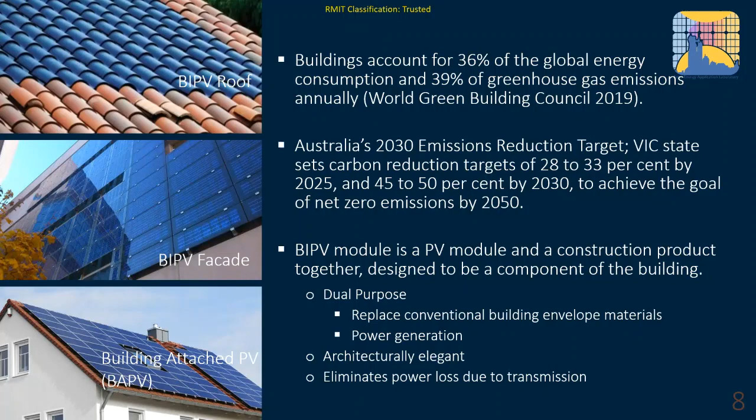So globally in the market, there are different products presented in different colors, transparency, texture, etc., with different integration systems. I think this message is very important, especially for the building sector in Australia, so they can select the right product for their project.

In terms of the project itself, globally, a lot of projects have been developed, not only in Europe in the last 10 years, but now we see a lot of changes happening in China. Meanwhile, other countries such as North America, Canada, Singapore, including Australia, have seen a lot of changes in this area in the last 2 years.

For the application side, BIPV can be used on the rooftop to replace roof tiles, roof shades, skylights, and can also be used on the building facade to replace curtain wall, rain screen facade, spandrel panel, etc. It can also be used as a shading device to replace carport roofs, etc. So there are a lot of application potentials to replace building envelope elements, and there are already successful cases globally to demonstrate that.

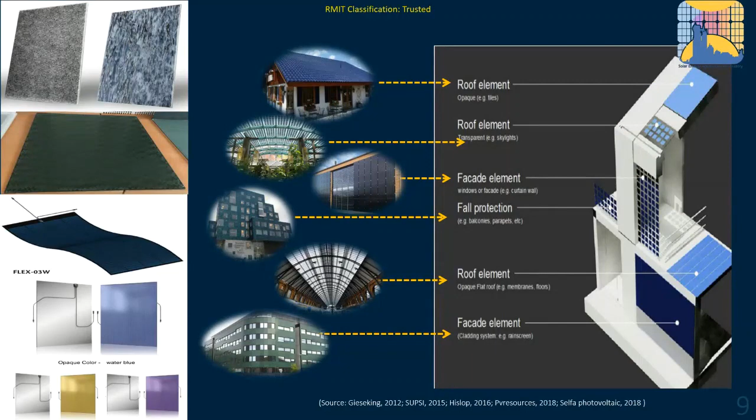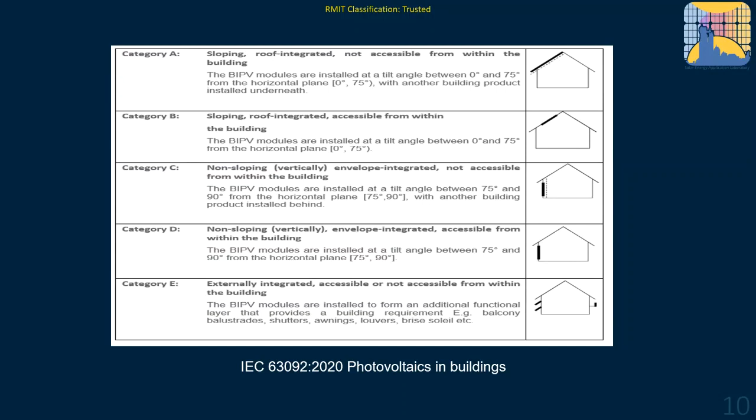In terms of categorization, the most accepted standard up to now is IEC 63092. We propose 5 categories. The first 2 are related to roof applications, differing by whether we can access the BIPV product from inside the building or not. The next 2 categories are about facade application, again depending on whether we can access from inside the building. The last category is about external integration, such as shading devices.

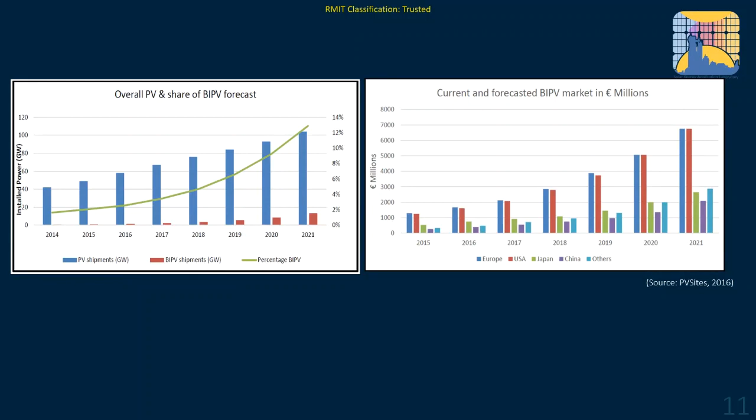Meanwhile, we do understand there is a lot of resistance to BIPV. A key problem is economic viability, so we want to understand whether BIPV is feasible or not, apart from the technical side.

Within our team, we collected a lot of existing global BIPV projects—45 at the date we published this publication, though now we have more cases coming. We did some analysis; as you can see, it covered different technologies, and all the products were developed in the last decade.

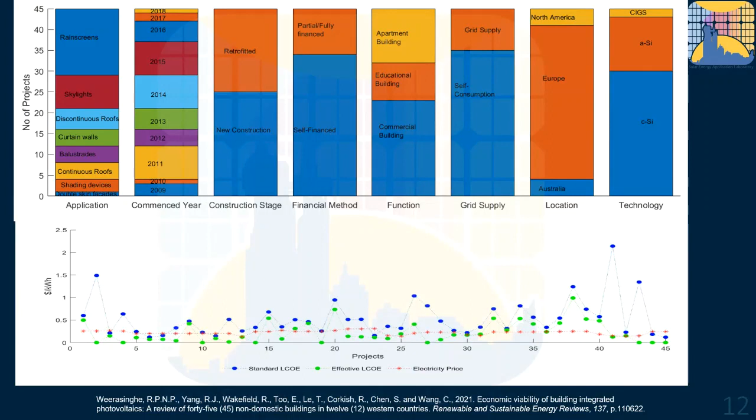We looked at the LCOE value as well as the NPV per kilowatt. From our understanding, if we consider the benefit that BIPV replaces conventional building envelope material, a lot of cases actually show good economic value. But it also shows that depending on technology and location, a lot of factors can impact the economic performance of a BIPV project. That makes more sense for building designers to really understand, for individual buildings in relation to a certain BIPV product, whether it is feasible to use.

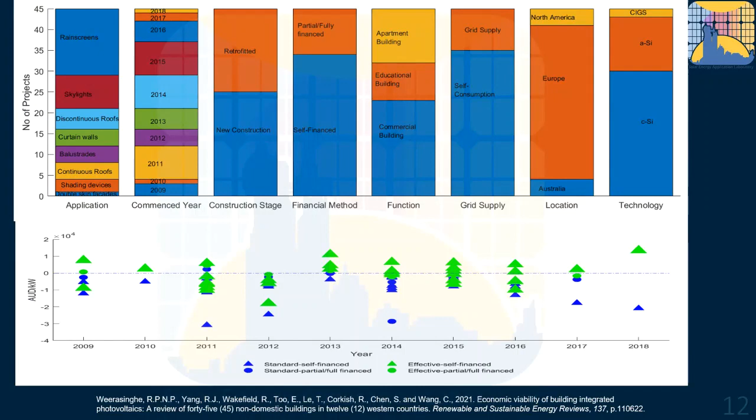Because every building, as we can see, is different. Yes, next please.

So, although globally a lot of products have been developed previously or are being developed recently, I also need to remind you that the charts we showed on the last slide are projects developed in the last decade, but basically completed 3 to 4 years ago.

Within these recent 3 years, there are a lot of new products with good value for money that have been developed as well. However, currently in Australia, if we look at some data, between 2014 and 2019, less than 2 megawatts of BIPV was installed in Australia. That's a huge difference compared to rooftop mounted PV.

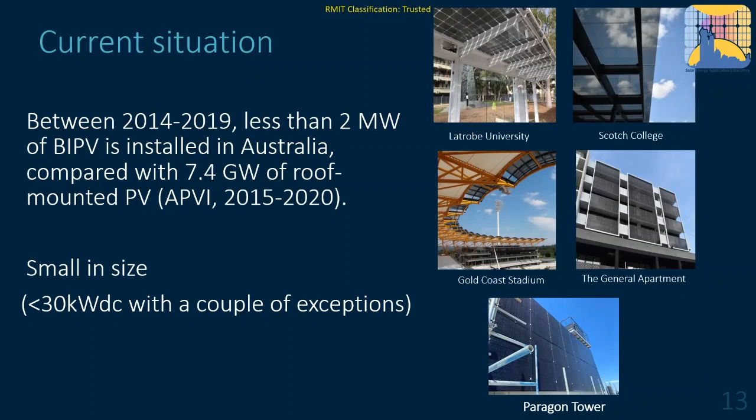And those products are very small in size. Although in recent years, from last year to this year, I do know there are some larger projects being developed with some interesting designs for building facades. Again, it's a culture change, and we do understand there are also a lot of hurdles for large uptake. Next, please.

To understand the complexity for BIPV product design, we looked into the different parameters which can impact the design, because different from rooftop PV design, BIPV is a building envelope material element. If you consider that as a prefabricated element, we not only need to ensure maximum energy generation but also consider the performance of the product. We also need to understand relevant regulations in relation to where you use the product, in terms of building class and building element, whether you want to use it as a window or as cladding material. The building regulations are different. Also, in terms of the construction process, what's the integration system to the main structure, that would impact the following steps in construction during building development stages.

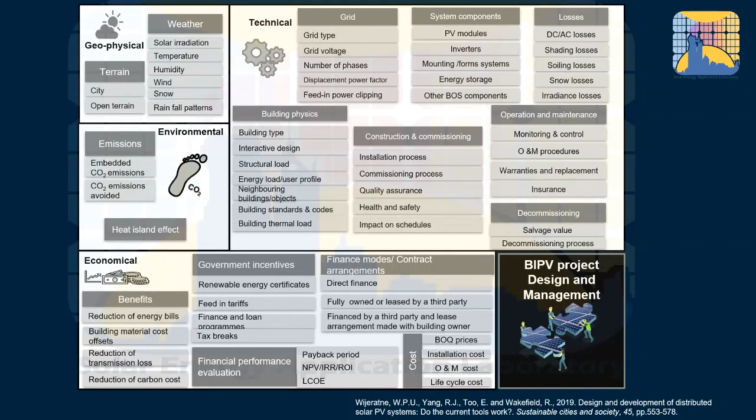Back to two years ago, we started to map it out according to the different factors we need to consider for a BIPV project. We mapped it out against the popular PV design software and also the popular building design software, to see whether those software or tools can help us really look into the BIPV aspect. It's not a surprise, but our main finding is that none of the existing tools or software platforms are really designed for BIPV specifically.

There are a lot of issues in relation to that. For example, some PV specific software really cannot allow PV panels to be used on the building facade. Even when they do allow it, they don't really have the BIPV database related to that. It's similar on the building side. Of course, you can create your own digital product, but that's fairly complicated, and only certain building professionals can use it. It's quite time consuming. On the other hand, if the PV manufacturer or distributor wants to demonstrate the value of their product, it's very hard for them to do so.

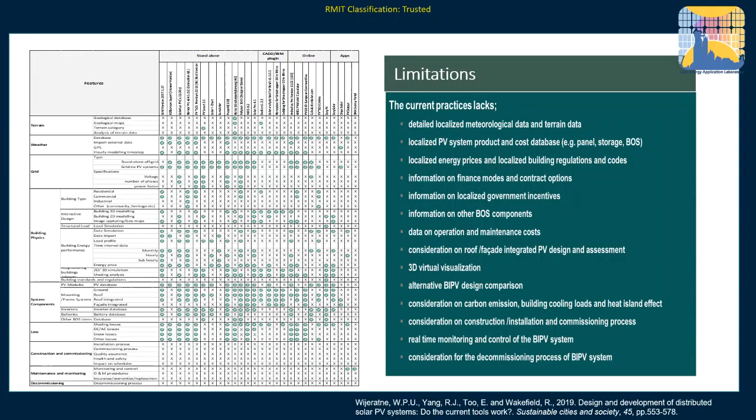So we propose some improvements. Next, Camilla, please. We propose some improvements, such as in relation to information - we think we should definitely establish a database for BIPV products.

Including not only the PV side parameters, but also the building required parameters or performance. We also need to enable the whole procedure for decision making, including building related cost information, for example for installation and labor, etc. But those are very hard for the PV sector to know. We also provide localized electrical side pricing and feed-in tariffs, because the majority of BIPV manufacturers are overseas. If we provide a packaged platform to reduce the effort from their side and demonstrate the value, that's good. In the meanwhile, building professionals can get more information about the BIPV product and it helps them do the design more easily.

For the simulation and assessment, we try to make it more professional and specific, like a building envelope design, so that you could place the PV panels wherever you want and replace the building envelope. We want to facilitate the optimization design process for decision making.

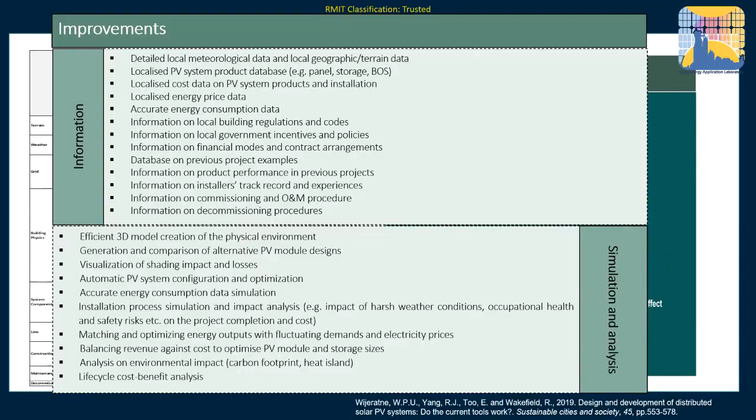Of course, based on one platform, we don't intend to solve all of the issues we have mentioned or pointed out. The reason is that BIPV currently in Australia hasn't been used a lot. The critical part for BIPV adoption is that building owners, developers, and architects need to accept this concept in the very early design stage instead of the detailed design stage. Otherwise it's too late, because the capital cost of BIPV is much more significant than rooftop PV, even considering the benefit of offsetting conventional building material. However, early decision making is very important for the building industry. That's why within the current platform we've developed, we want to provide a user-friendly platform and easy procedure that integrates product regulation, technical, economic, and construction data to create a leading BIPV solution.

So here's the framework of our platform. As you can see on the top, we created a BIPV product database. Within our whole database, we have more than 140 products. However, in the platform, depending on which version you select, the number varies because of some confidential information, etc.

We also have our standard database, which provides some building-related standard information, or at least understanding of the requirements. We build up the weather database based on data collected from BOM, and we build up the financial information database that includes localized rates, energy prices, etc., as well as construction related cost.

By collaborating with leading quantity surveying companies.

And we allow our users to build up 3D building models within our platform and do the energy simulation in terms of solar radiation, in terms of shading losses in the urban environment, and consider that to generate DC and AC outputs from that.

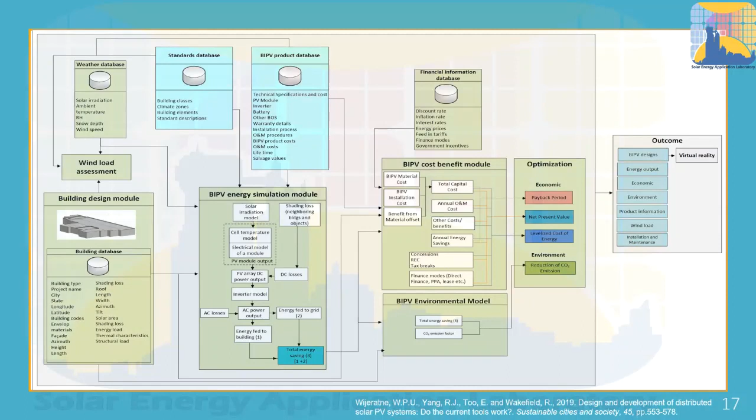This allows a lot of flexibility for them to do cost-benefit analysis, environmental related parameter analysis, and we give options for them to select different versions, whether they want automatic optimization to help with decision making or not. The output we provide in the platform includes the BIPV design in 3D format, energy output, economic and environmental analysis, product information depending on what you want, wind load performance, and installation and maintenance. We even provide a small VR app to facilitate the visualization process.

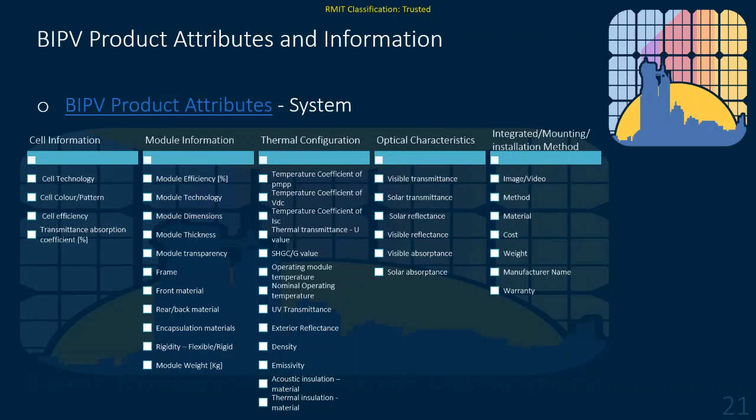Say the method, or some even provided images or video to show how to install their product. Next, please.

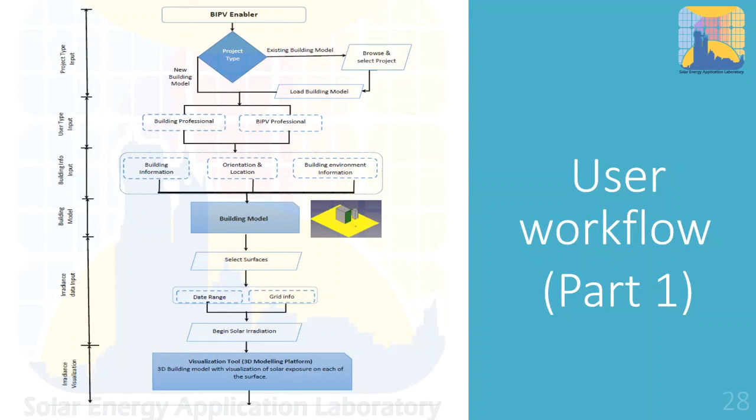And then you select the building surface where you want to put the PV, and give a duration you want us to do the solar irradiation simulation. So the platform would do that and generate and visualize the solar exposure from that in the urban environment.

And after that, you select BIPV application type, BIPV color, transparency - it's all about your preference and what product. Say PV manufacturers, you can select your own product. And then you set up some calculation parameters.

Then you have two options according to different versions of our platform. You can purely do the simulation by yourself, and we generate the results as what you prefer to say. Alternatively, there's an optimization module in one version where we could help you to generate the results. But no matter what version you do, we also do wind load calculation to tell you. And again, you have options for the VR part.

Okay, let's have a look at the demo video we generated for you. I think that's maybe the most important, interesting part in today's event.

Because we understand there are participants from the building sector and PV sector, here we just make a simple demonstration because of time constraints. We want to show you the major procedure.

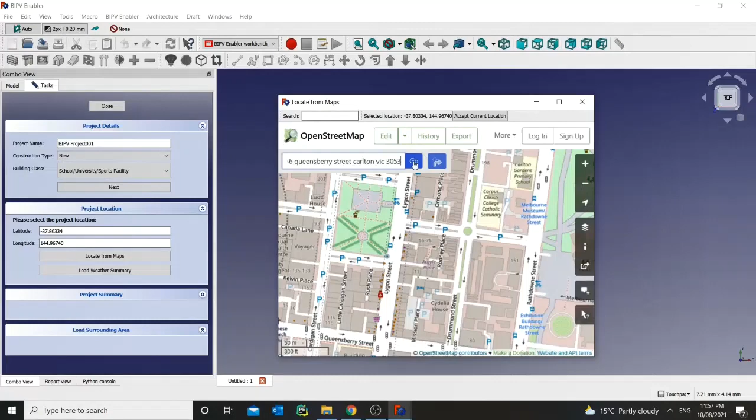So you can create a project, whether existing or renovated, and select building type. The next step will allow you to select the location of the building. You can either put in the exact location as you want, or you can select from the map. You can type in a location in Australia, and we would help you identify the exact location of that building, and put that information into our background.

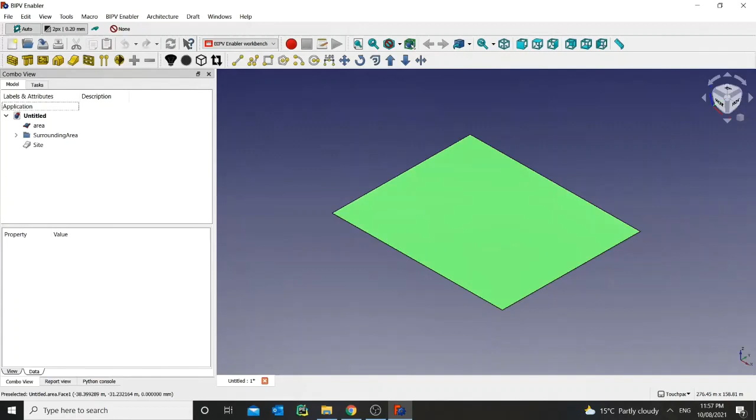Then the weather information - by default, we use the BOM data related to the nearest weather station, but you can put in your own. And then you generate the entire site you want to create.

Then you start with the 3D process. So you can select a building within different shapes. There are some predefined shapes, or you can design by yourself. You will see that shortly.

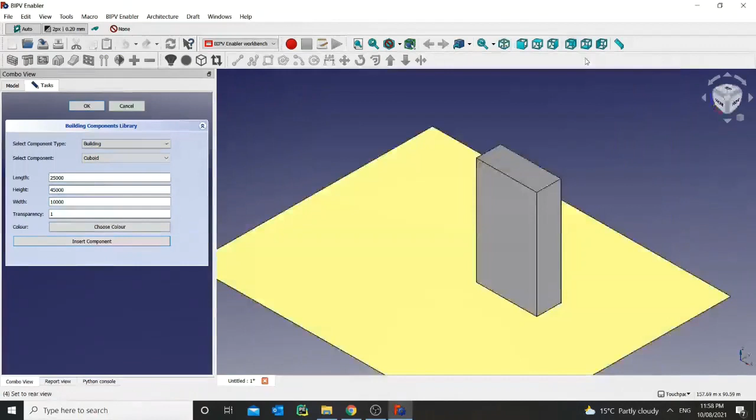Say, for example, this one is a pre-designed building, but of course you can change the dimensions - not very hard. And you can move around the building and change the orientation and location within your created site boundary. You will see that shortly, I believe.

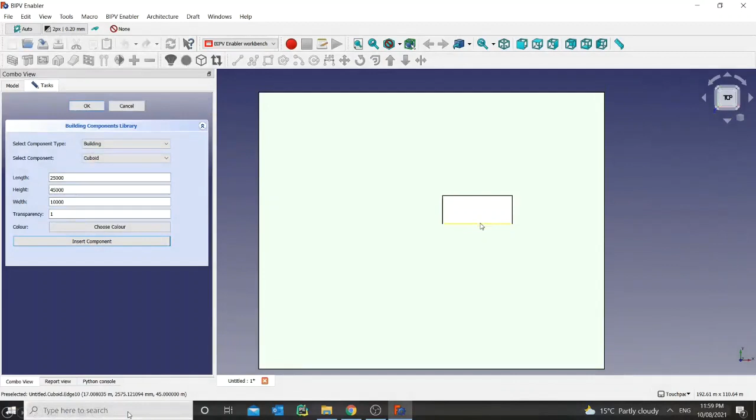Pam, the video is not playing. Okay.

You can move it, as you can see. You can change the orientation.

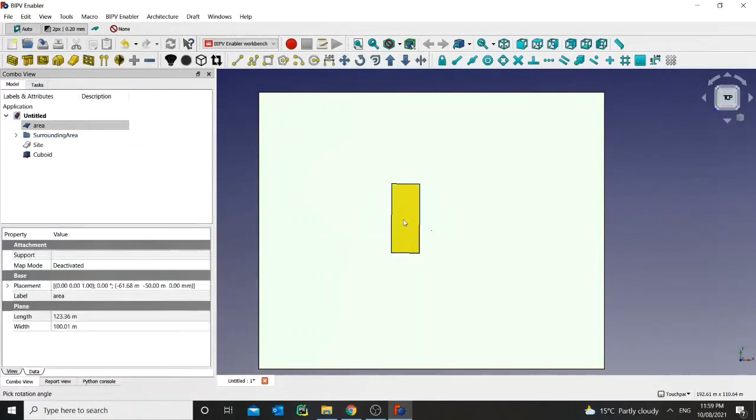Of course, you can create a building if you want, if you have an architectural background. For example, here we will show you that you can create a base of the building and then add walls to the building, choosing different basic shapes as well.

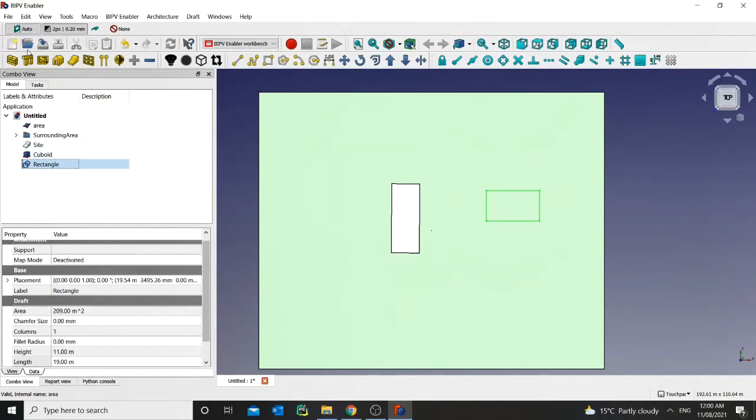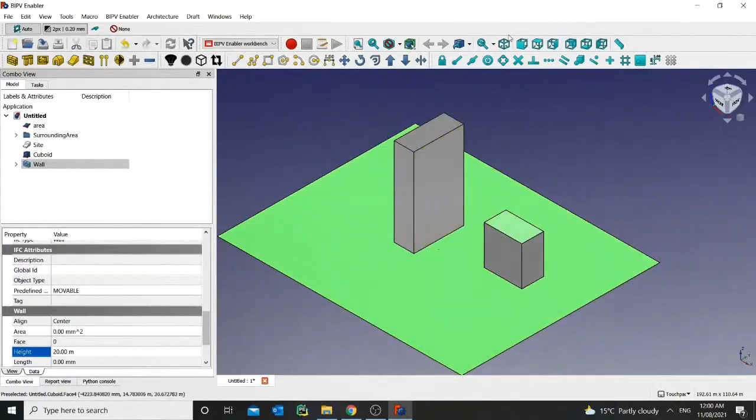It's most likely like a typical building design software. However, if you have a lot of building design experience, you can generate more complicated building design. But for a lot of users, especially for the conceptual design stage, you don't need to create very detailed design. You just create the demonstration of the building envelope and the neighborhood, as you can see, to help you simulate the solar irradiance.

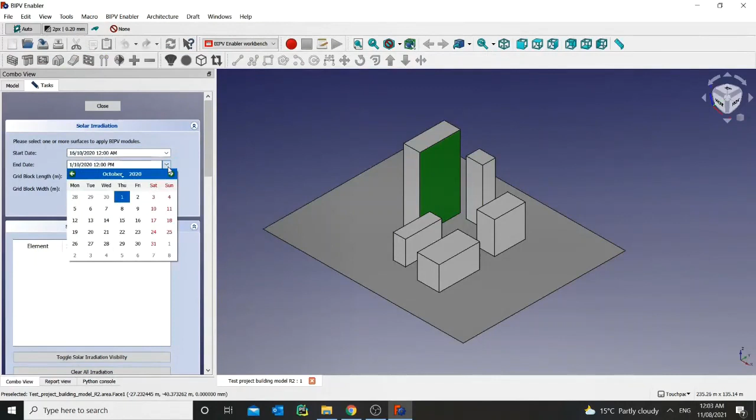And after that, you select a surface, as we highlighted, and you select a start date time and end date time. For this demonstration, we only did that for a day, because we also want to indicate how long it would take for the whole procedure. As you would notice at the bottom of the screen, you would notice our time.

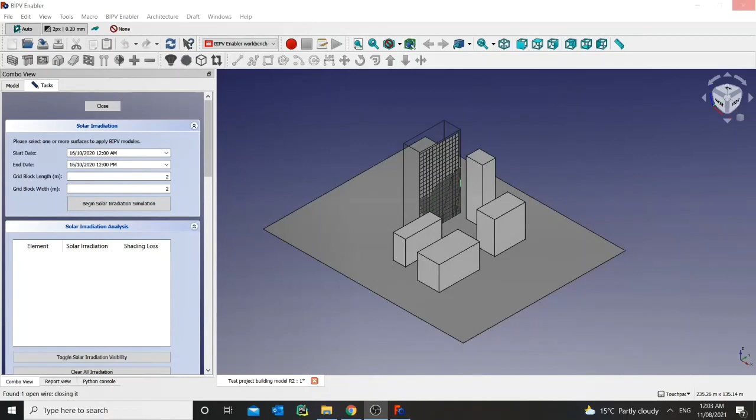Actually, the whole thing, we created within about less than 1 to 2 hours. However, we spent some time to really decide which one to capture, so the real time for the whole thing up until the finish is much less than this. But we do want to let you know that for the solar irradiation simulation, the more duration you select, the more time it will take.

Then, as you can see, you select the application type where you want to use BIPV. You can select other parameters if you want. Then the database will tell you what the available products are, and then you can choose the calculation parameters for a lot of economic related parameters and even the environmental related parameters.

You can import the energy consumption data, as we have shown just now, or you can ask the system to choose the default energy demand data. If you don't know that, we will decide that based on the building class. So the result is generated for you, as you can see here.

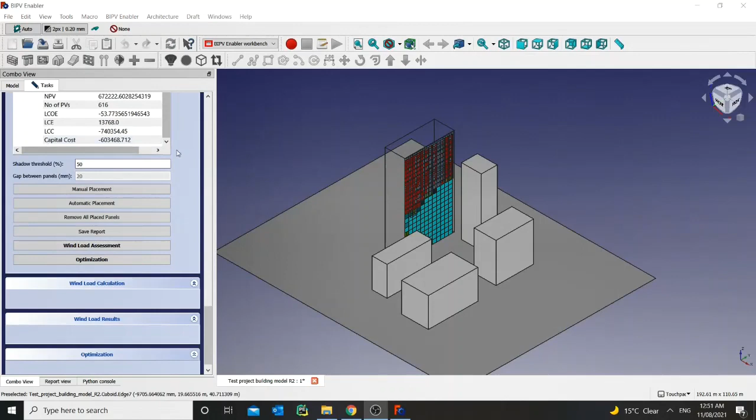The default option here is that we generate the result, making the design in parallel with the building surface design. As you can see here, on this surface we selected cladding material, and within the automatic generation, they make it in parallel with the surface.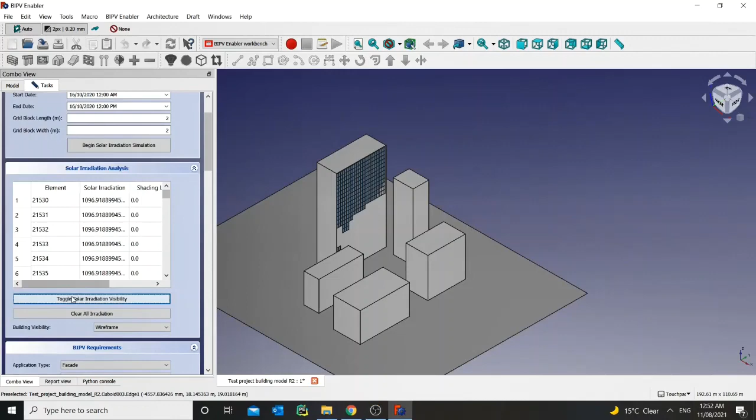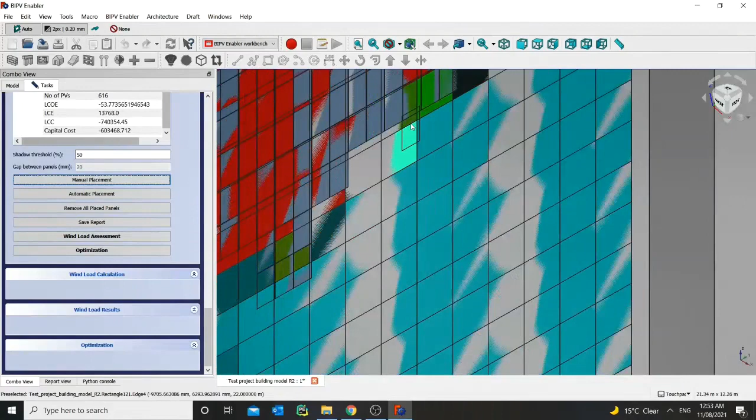And if we remove the solar irradiation visibility, then you see the PV panels are all selected, but only put where there is high solar irradiance area with your selected BIPV digital product. And you can actually remove or add panels as you wish on the surface wherever you want, or you can go to the automatic placement and delete the panels if you want. But there are different options for this as you wish.

And you could save your results into your local computer.

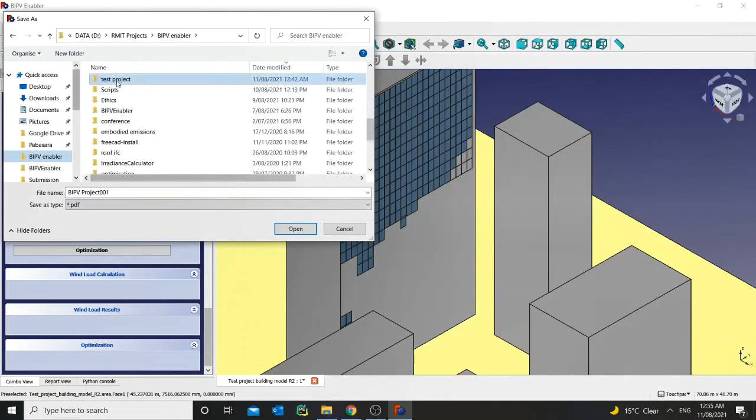And of course, here we didn't demonstrate, but you can select what product information you want to show in the report or the results in the report. But I need to tell you, not all the information we collected can be released, but there are alternatives for you to get more, which we will talk about in the physical test session.

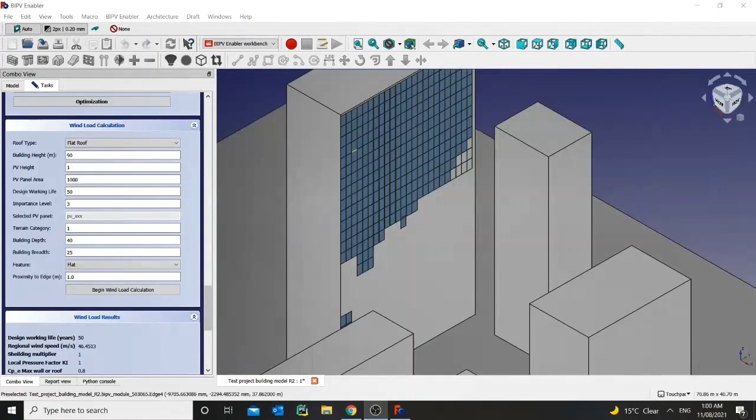And you could do the wind load assessment. Although this part is not recommended for PV professionals but for building professionals, if you want, you can do this. Because there are a lot of cases where we can provide the wind load resistance level of the PV panel, and then you can just do a quick check and see whether the product can be used in this situation in terms of the location and the height, etc.

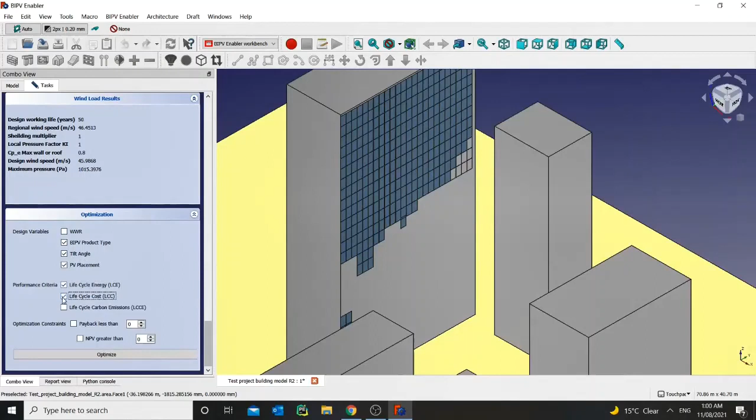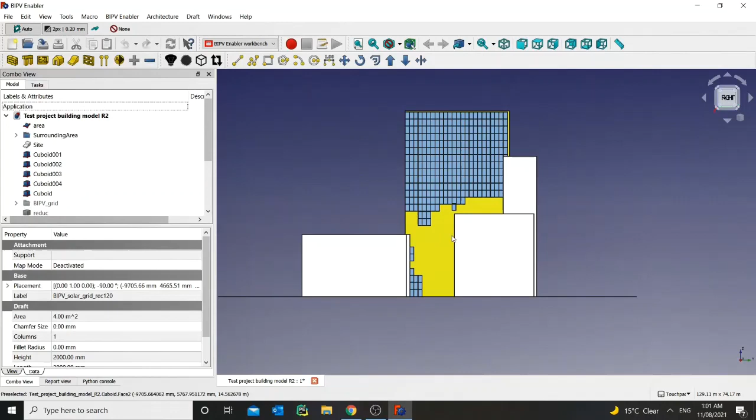And we give you the option, as I said, to do optimization depending on the parameter you want to use and the performance parameter you want to compare, which I will show you the results on my slide shortly, because there are a lot of things that can be shown. And I believe there's a little bit of demonstration here regarding whether you could move the PV panel or not, and whether you could add that or not.

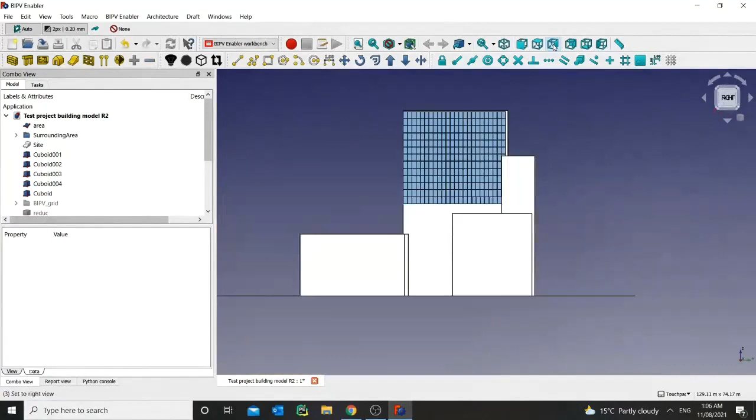And after that, you can import that as an IFC file. And you can export that as an IFC file and import it to our VR app. And you can see the design of this building from there if you wish to, but I believe this is the last action if you want to select as an option here.

Let's move to the next slide.

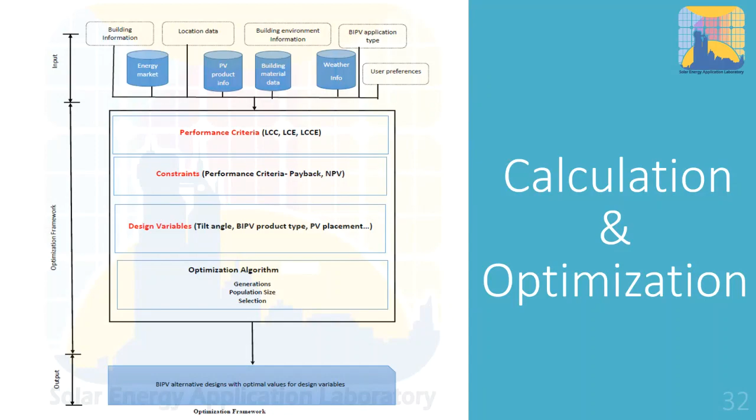For example, those two case studies we have done as test cases: one is for rainscreen facade, case 1, and the second one is for roof sheets and skylights.

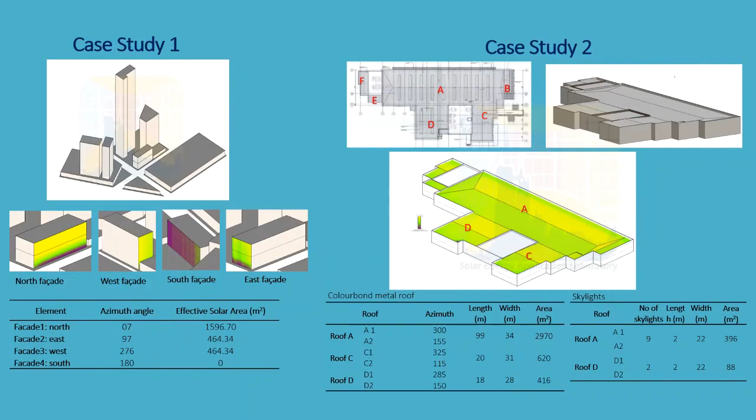For case 1, for example, we look into whether the PV should be used on which surface of the building, the 3 directions we select - east, west, north - and what objective you want to achieve, whether you want to maximize PV generation or life cycle cost, and we gave some constraints.

We selected 16 products for the comparison, and as you can see, with the combination there are more than 200,000 cases. However, with our algorithm, it can tell you the results very soon.

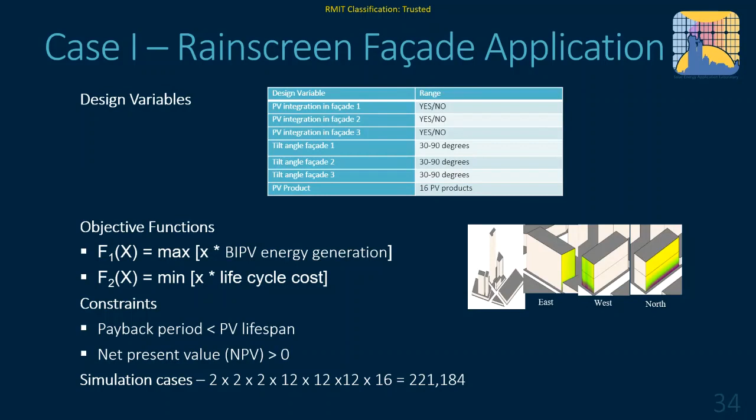It's similar for the second case for the roof sheets with different combinations of 16 products. We get a lot of options.

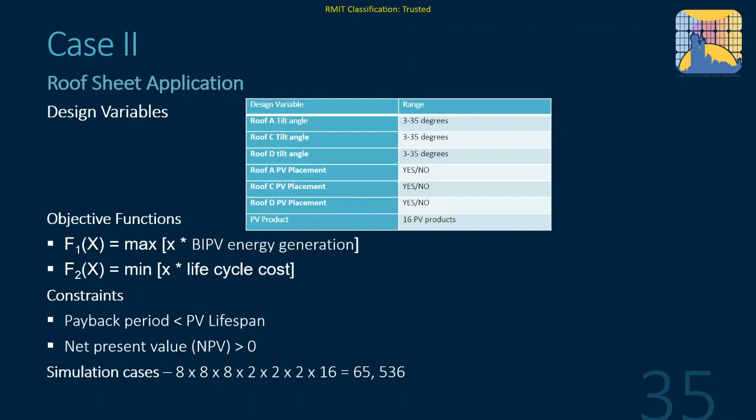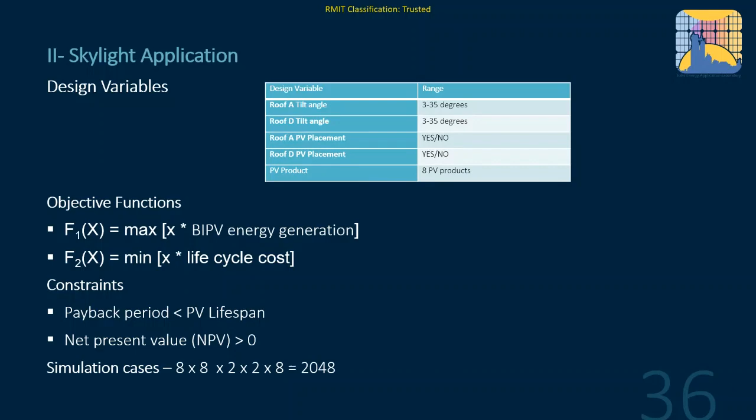And skylight less, because we selected less PV products in this case. But again, it's still a lot for manual comparison.

So our software can tell you, in terms of different cases, the optimum design options. It doesn't mean we give you one solution, we give you options. We ask you to select from the options, but we ensure that those options are the best ones within the whole cohort, or all possible scenarios.

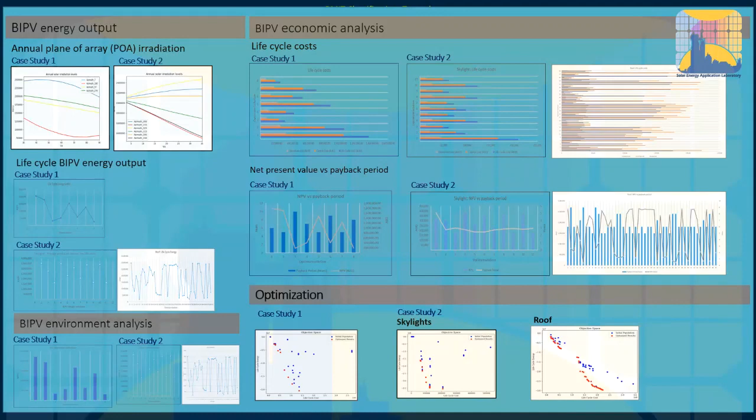And we can give you the POA radiation, life cycle energy output, and economic analysis, demonstrating that we've optimized the option.

A typical example: for one case, we give you 12 options. We tell you those 12 are the best within the several thousands. And we say, okay, you might consider putting PV panels on this surface or that surface, with what tilt angle and what product you could consider.

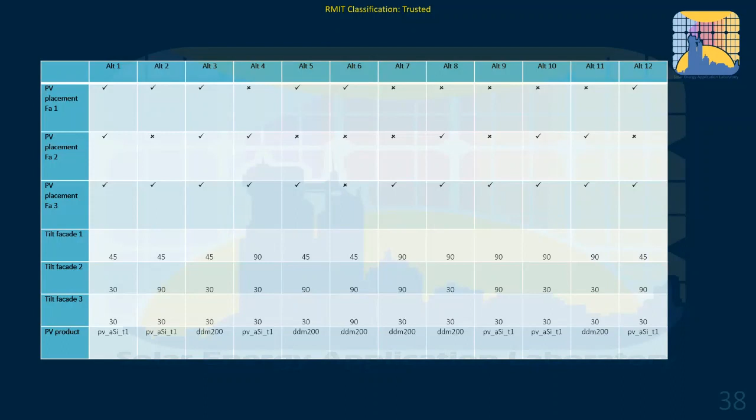But in relation to the different options, as you can see, the performance is different in terms of life cycle cost and life cycle energy. We also show you the different options with different outputs.

Some people may care more about life cycle cost, while others want to see the balanced solution. So that gives you different decision options to facilitate building professionals in convincing building owners about the option and making the right decision.

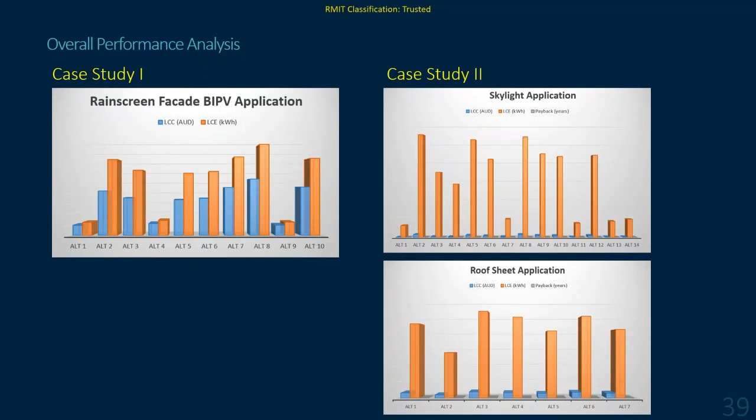So we can demonstrate the design - a more complicated design.

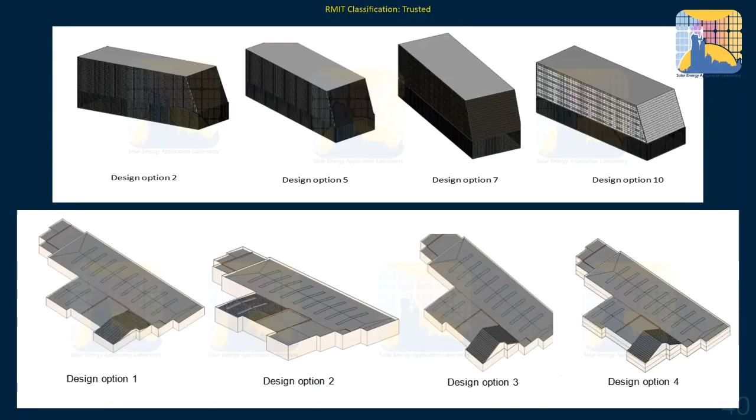Okay, so that's basically all I want to mention related to our platform within this time frame. But what's next? We do want to get some feedback from you, and you will get a follow-up email from BIPV to inform this.

If you wish to participate, please let us know. Especially, we are organizing upcoming physical trials in major cities to really use our platform, but of course depending on COVID restrictions. We are very interested in BIPV product design, modeling, and assessment. If you have any interest, you can always talk to us - you don't have to use our software or platform. We could still do that.

We are also interested in BIPV standardization, and we do research projects related to this to try to push industry change. We're also interested in trial projects, testing labs, product testing, performance certification, etc., and policy decision making.